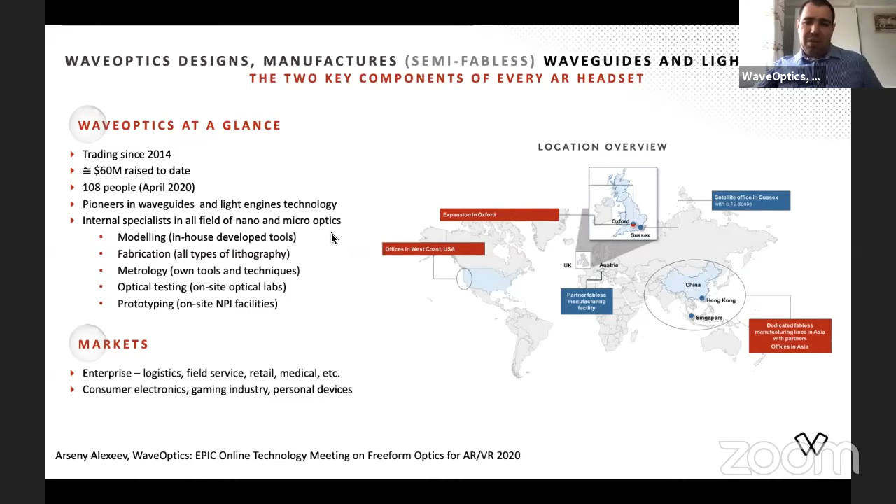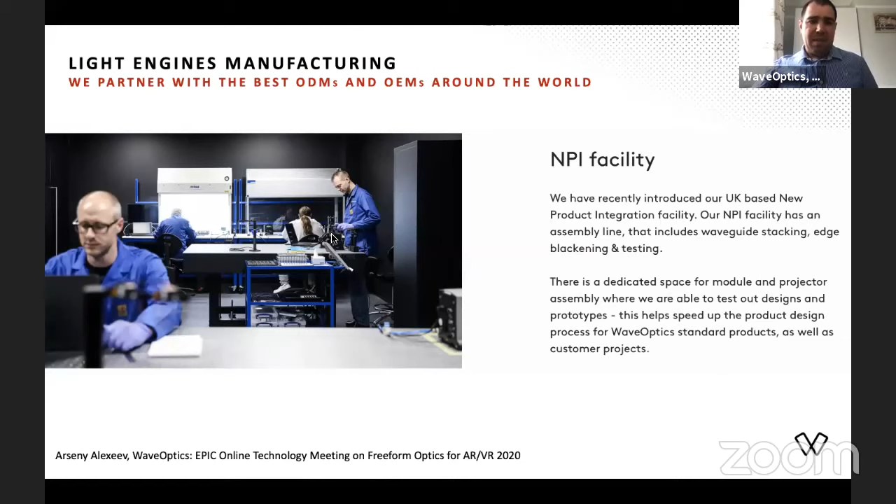Coming to the end of my presentation, just to answer two questions which Epic asked. This is what we can offer to our partners and customers. The first item is co-development. We do a lot of work together with our resin suppliers and glass suppliers in terms of bring-up of new processes. And the same applies to light engines. We do extensive R&D with our partners to develop new prototypes of light engines.

So the second item which we can offer is advanced metrology, and I think this is a topic which was covered in previous Epic meetings, because nanophotonics and micro-optics requires new solutions and different types of tools to control quality of the final parts. This can be very challenging because, as I mentioned, we work also with nanophotonic structures. Some of our structures are below 100 nanometers. And this is really challenging for any metrologist.

So you can see the list of the tools which we developed over the years. We do extensive characterization with SEM, AFM on the nanoscale of non-conducting samples with very high accuracy. We also have tools for chemical characterization. We do advanced ellipsometry, extracting refractive indexes at nanoscale. And also we have some advanced optical metrology allowing us to extract critical dimension in nanometer or even in picometer scale.

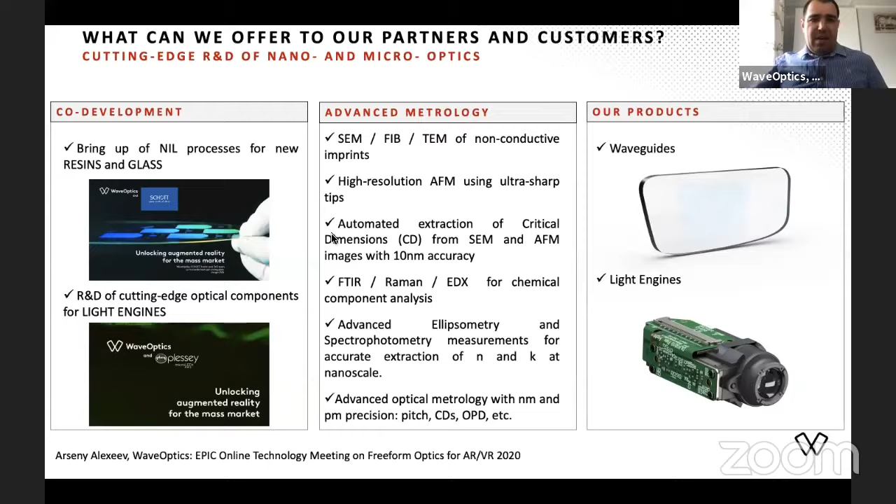And finally, in terms of light engines, of course, we're interested in advanced optics for them. As usual, smaller size, more lumens, less power consumption, and we're interested in different solutions. For instance, metamaterial-based lenses are one of our interests in this field. So with this, I come to the end of my presentation.

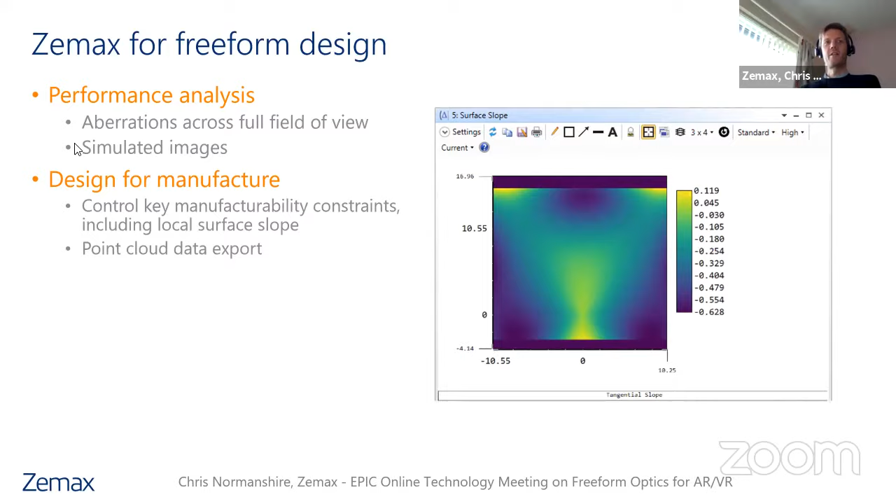So really, I'd like to end it there and just say, hopefully that's given you a different perspective on some things that are available. And hopefully we'll hear a bit more about what manufacturers can do with this data afterwards. But as I say, I'd love to hear where people are using freeform optics, or where they would like to if they had better design tools available.

Thank you so much. Design tools are absolutely very important for AR, VR. Maybe the answer to some of your questions we can get from Angela, who's going to give a talk right now from asphericon. I'll unmute you. How are you doing, Angela? I'm good. Can you see my screen? Yeah. Okay, perfect.

So I will talk a little bit about freeform from a manufacturing point of view. To give a broad overview, this is our slogan. I will come directly to freeform optical systems. We would like to make freeform a kind of standard in optics. If you want to realize that, we have to manufacture freeform optics as well as aspheres or known optical components. As you can see, freeforms sit in between in packaging, numerical aperture and field of view. The working range is extended, freeform surfaces allow you to break the symmetry, and high integration is possible.

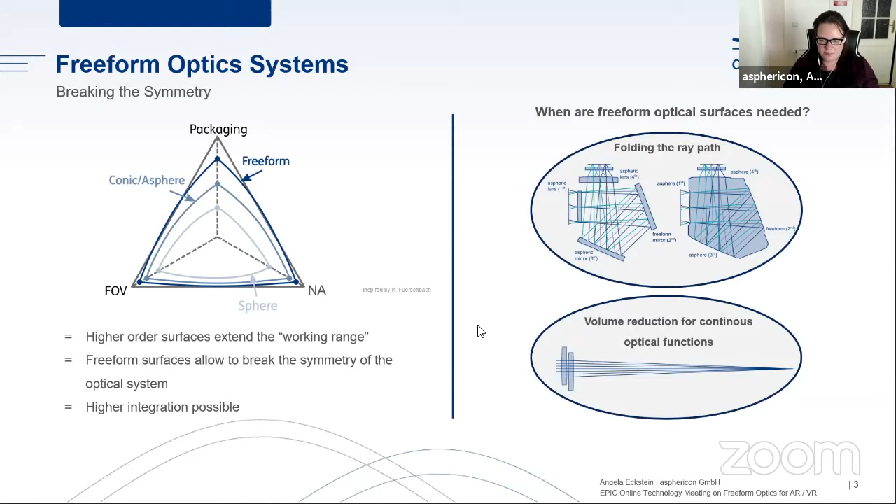So when is a freeform surface needed? When you need to fold the ray path in a very small volume, and this can be done with a monolith, for example here with three aspheric surfaces and one freeform, and when you need to reduce the volume for continuous optical functions. I got one slide too far.

So what is asphericon doing? We have a lot of different tools available to create such freeforms. We can do that in almost any material you can imagine, which means we have diamond turning machines and grinding and polishing. We also have a large metrology park to create designs, manufacture the optics, and measure the surface structure as well. But we not only rely on the design, we also need to introduce the form factors of the surface eventually.

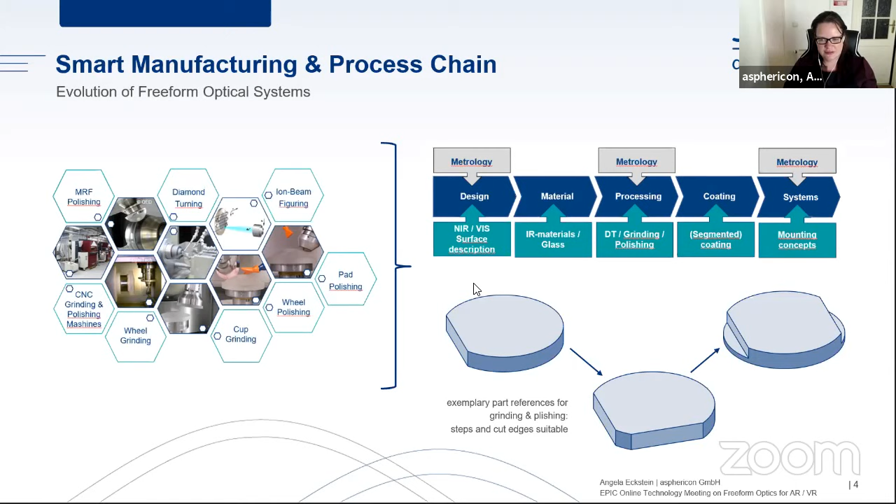Coming to an example, before we had a system that was very large, and this has to be folded into a smaller system made of germanium, and the volume reduction was 75% from the before system to the after system. And we also did a very good surface form deviation of only 1.7 fringes at the end.

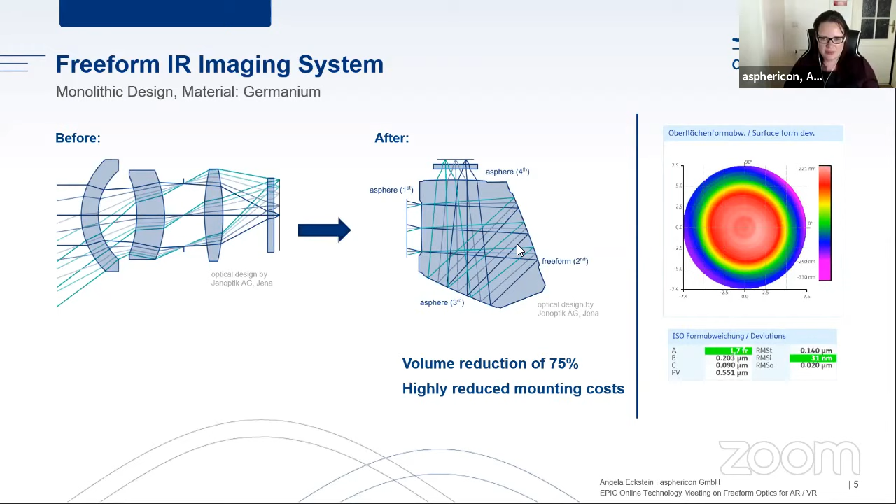And you also have with this monolithic system highly reduced mounting costs, because, as everybody who knows how to integrate optical components knows, it is very difficult. And having this as a monolith will reduce the mounting cost because the tolerancing is done within the manufacturing. My last point is higher order Alvarez systems.

So Alvarez lenses are two lenses that have a 3D or 2D optical surface that are shifted laterally against each other. So if you shift them in this direction, you have a focal point of 225 millimeters. And the good point here, you have a flexible focus shifter in a very short building length. And we also measured these items.

This is the RMS wavefront error of 55 millilambda, and also for the other option or setup system, we can see it depicted here. It's mounted. This system is already diffraction limited, so we have a very short building length for what you usually do with a telescope that is very long. We created a diffraction limited system without the long distance that a telescope usually has.

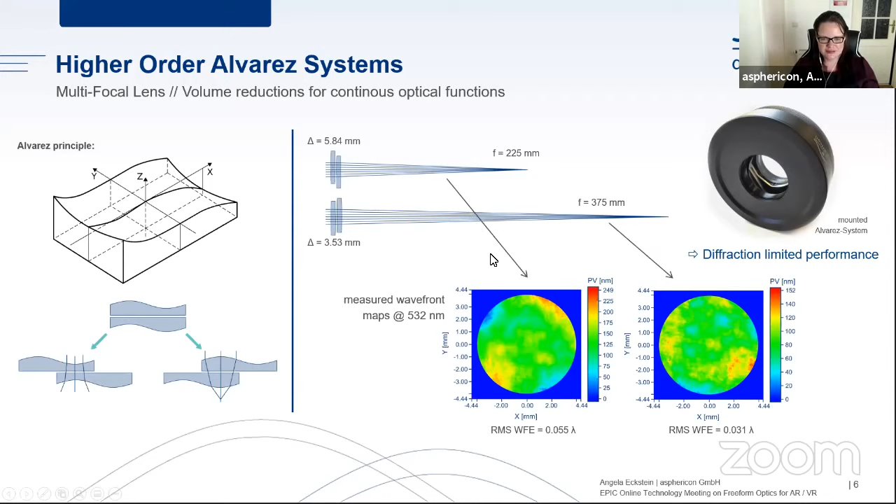All right, thanks. Thank you, and sorry for that. I couldn't find the button to unmute myself.

Great presentation from asphericon once again. The capital of optics in Europe is Jena. Later we go to the capital of optics in the US, which is Rochester. But before we go to that, there are a couple of issues I want to understand. We had the presentation from Chris. He's been working heavily on helping different optical designers in the field of freeform optics for some time. Chris, what are the main challenges, the main questions that you're getting from optical design companies?

What are the main challenges we're getting from optical design companies in this area? From companies, as I mentioned, it's been more the modeling of the diffractive waveguides. So surface relief gratings for the in and out couplers and pupil expansion systems, or volume holographic gratings. We've put a lot of work in recently to accurately model those, and things like diffraction efficiency, so we can model some of the more subtle effects that compromise the performance.

And this is where freeforms can potentially be a solution for this. Freeforms offer an opportunity to address these challenges. They offer unique advantages in optical designs. And this is something that Chris mentioned earlier, as well as others, is that freeforms offer the advantage because you no longer have to stay on axis. You have a lot more degrees of freedom in your design. You can look into miniaturization, again, off axis. You can get a lighter weight system to reduce that bulkiness, conformal shapes.

But a lot of these increased freeform complexities can lead to manufacturing complexities as well. And I have a couple examples over here on the right, just to show some of the unique designs and some of the trends that are happening with getting smaller and smaller.

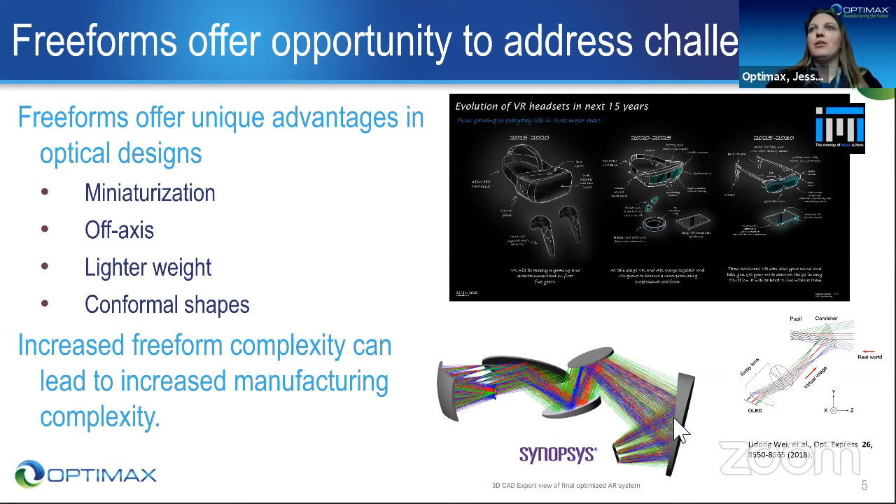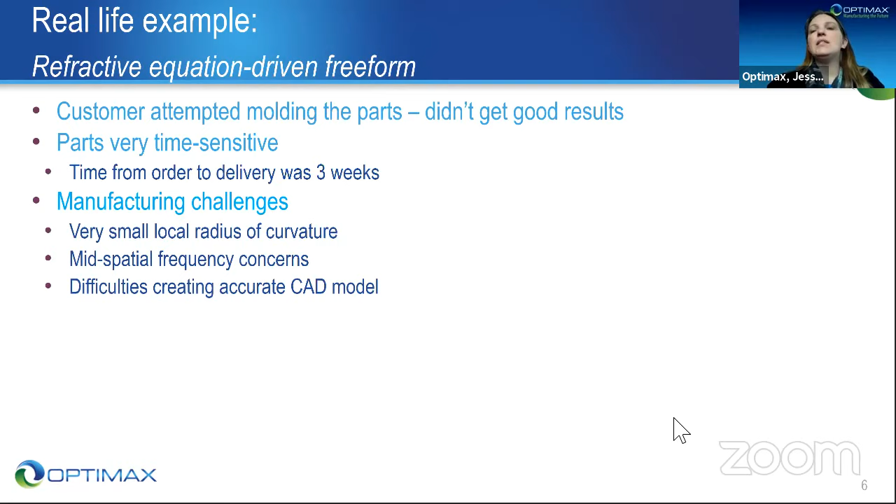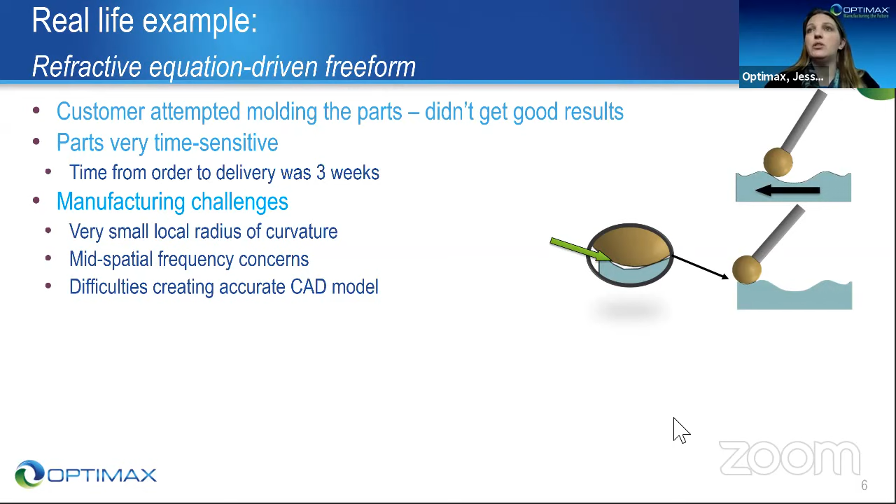So quick real life example, and then I'll conclude. A refractive equation-driven freeform. We had a customer come to us. They tried to mold these. It didn't work. They were very time sensitive. They needed these in 3 weeks. Manufacturing challenges, some people have mentioned this before, had very small local radius of curvature. Using traditional techniques, your tool has to be smaller than the features that you're looking to make. Mid-spatial frequency concerns, of course, we had difficulties creating the CAD model as well.

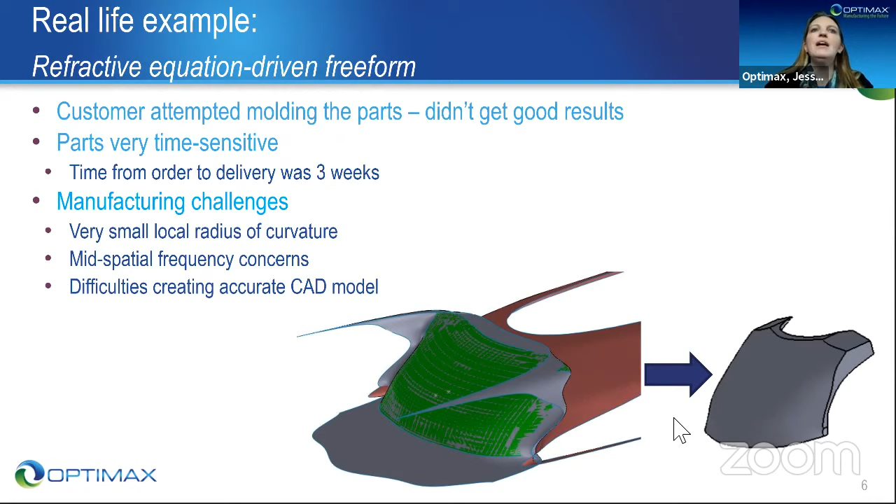However, we put a bunch of really great engineers on it. We developed a method to create this freeform CAD model. And within 3 weeks, our customer was delivered a beautiful freeform optic. So in conclusion, freeforms continue to be the future. We're trending towards higher precision and more extreme surfaces. They're being used to reduce system size, off-axis design, and conformal windows and beam correction.

One thing I did not mention, and happy to talk about it later, is finding ways to reduce total error. Not only is wavefront error important, but positional error is important as well. And experience leads to breakthroughs. I firmly believe that collaborations are driving more extreme surfaces, and Optimax is very interested in partnering with additional universities, research institutes, and many people from industries such as yourselves. As an industry, we continue our journey to higher precision freeforms.

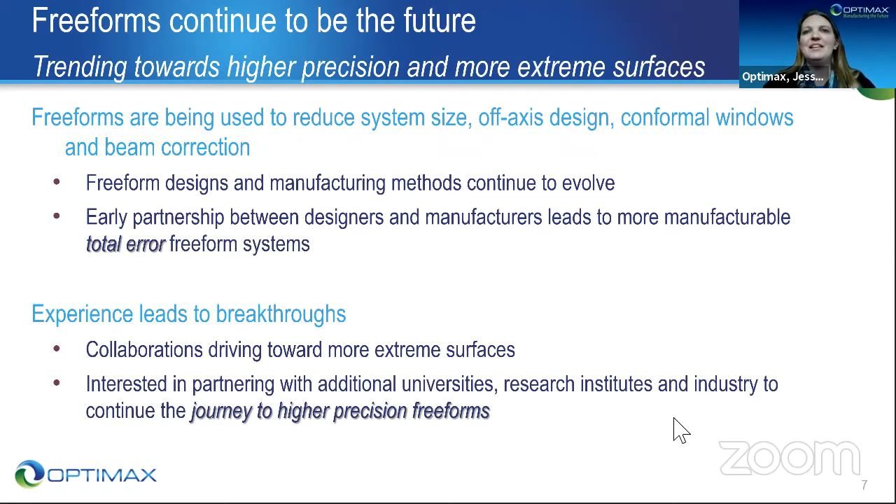Thank you very much. Thank you so much, Jessica, for your talk. It's very nice that you're open for collaborations. That's what we're looking for. I would like to first ask the audience, if you have any question, please raise your hand or just raise it electronically.

Yeah, please, WaveOptics. Yeah, just a quick question. You mentioned some thin film deposition. Would it be possible to get a range of materials which you can deposit, and whether you offer it as a service? Yes, we offer it as a service. And so we have many different coating chambers. I mentioned many different deposition techniques. We do a variety of different materials. I think maybe offline we can talk about your specific needs. But obviously glass, crystals, polycrystalline ceramics, all of those things as well. Sounds good. Thank you. Mark, you wanted to say something?

Yes, to Jessica. Certainly, I think your company is a fine company. I didn't want to imply that, but why do you think your firm has a reputation of kind of violating the traditional definition of freeform? So I didn't quite catch the very last part, but I do know that. So one of the things that we've mentioned about freeforms: if our customers want to define an off-axis asphere as a freeform, we're not going to stop them. How we define freeforms is how we manufacture them. If we can't use symmetry in the manufacturing process, to us, it's a freeform.

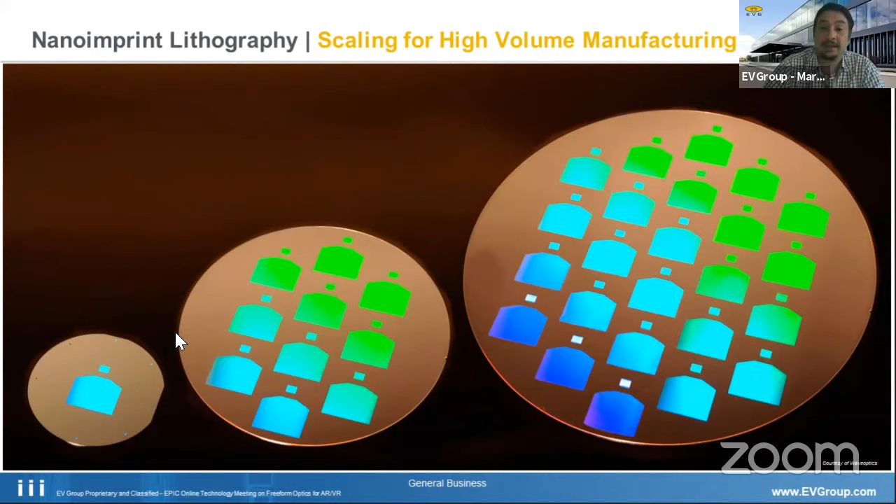And basically what we can do here is go through this whole process, starting off with such a single die. This time, of course, we don't show details of the design of the structures. That's proprietary to WaveOptics, but we have a very nice reference design. And here you can see it also starts off with a single die, which you make by E-beam lithography and etch into the wafer. And then we go for the step and repeat imprinting.

So we do the nano imprinting one by one, taking one die, doing exposure, separating and making the next one until a 200 millimeter or even a 300 millimeter master is filled. That's the so-called step and repeat master. And from this one, because it's still a very precious thing and you want to use it for a long time, we then make so-called working stamps, which are actually used for the imprint.

And from every working stamp, we can also make many imprints. And so you can scale from one die to really high volume for WaveOptics, for the production of such waveguides.

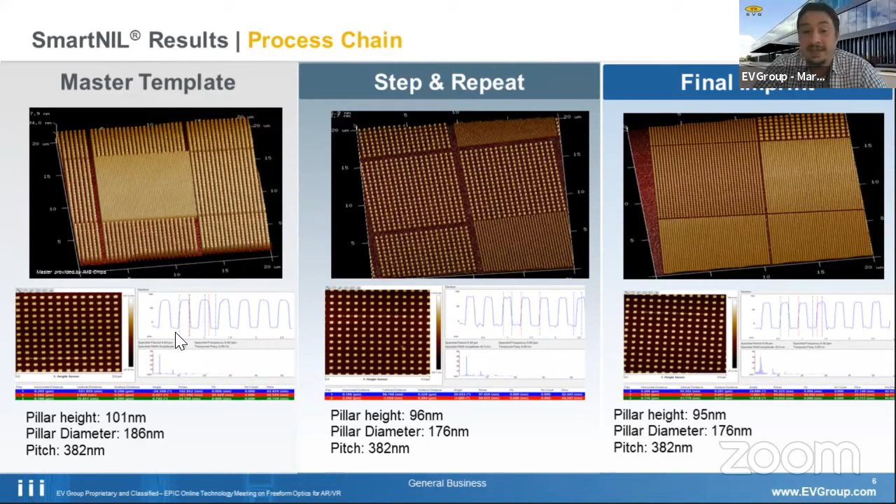This is a common thing that's well known for any molding process. Thermal molding processes also need to live with some deviation from the master. However, it's stable and can be biased, and that's the nice thing. And of course, there is literature on what structures can be used for waveguides and augmented reality, and basically we have reference structures for all.

So for example, NIL Technology, Jose knows them also very well, provided us even these very fancy looking slanted structures. But from binary, blazed, slanted, or whatever structures, we can do anything that's required here and replicate in a single shot, very efficiently in functional materials. And if you have a master, we can go for the step and repeat imprinting and directly to high volume manufacturing with our systems. We have this all in place here at headquarters so we can give it a run for the development.

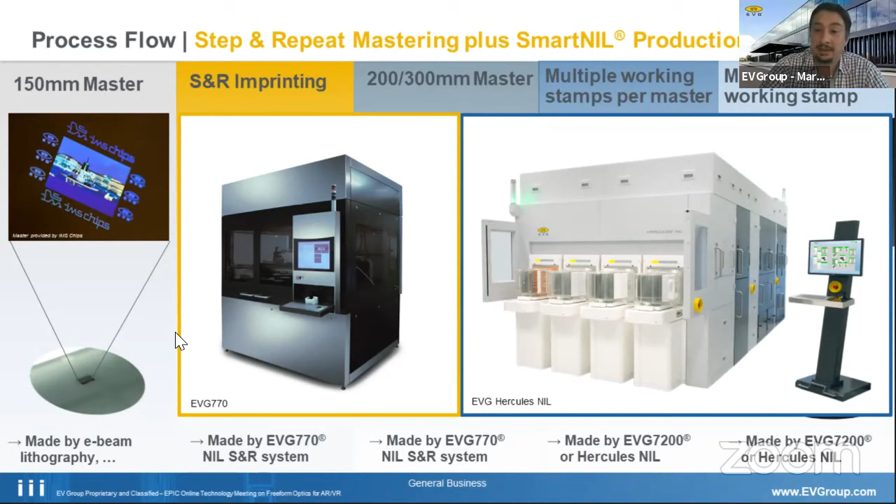And actually, it was quite a journey to get there. EVG, as I said, has its 40 years anniversary. Two or three years ago, actually, we had a 20 years anniversary of nano imprinting. So we had started at university, but around 2013 it really picked up that people wanted to see it in production. And of course, augmented reality was a big topic and driver here. And as you can see, this sped up the development quite a lot.

And when you look at the timelines Yole is predicting, we would be happy to see this really happen, but maybe that's not only on us, but we are definitely convinced that guys like WaveOptics will make this happen. And we are looking forward to it. Personally, I'm really looking forward to getting this on the market.

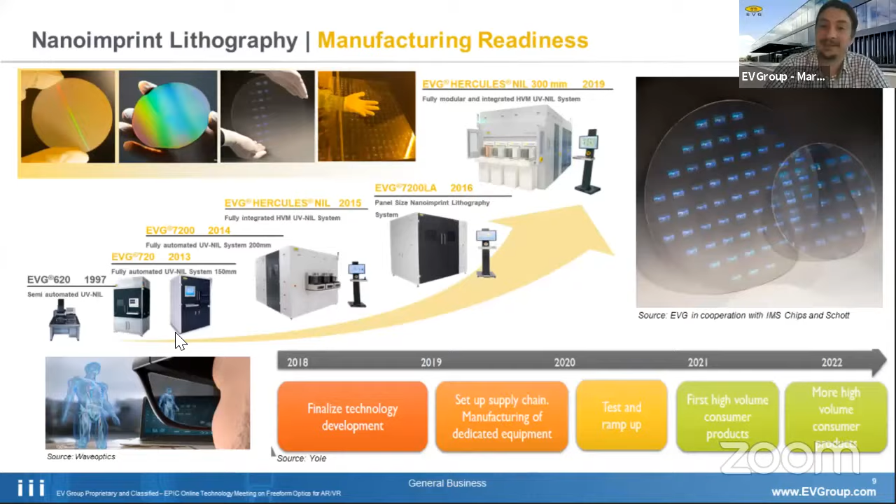How can you engage with us? What can we do for you? Basically, we have a smart way to collaborate for success, which we call the NIL Photonics Competence Center. You can establish the manufacturing process here. You have a close collaboration between process and equipment needs. And you can bridge the gap between R&D and volume manufacturing.

So any idea you have in the lab that you want to get into the fab soon, for a short time to market, let us know. And very important, I want to mention here, don't limit us too much to nano imprinting. Augmented reality doesn't only need the waveguides, though of course they are a very important part.

However, there are many sensors, maybe 3D sensing or other sensors required for these devices with very small form factors. So we are very active in wafer level optics. We have our own development line and pilot line here, and we have a track record for high volume manufacturing worldwide.

We can do advanced resist processing. We can do heterogeneous integration, so combining different form factors, combining different materials. And last but not least, there are also new ideas to apply, for example, for micro LED displays, the same methods as for CMOS image sensors: go for 3D stacking and hybrid bonding.

So yeah, what can you do for us? Very simple. For those who already work with us, let's make it happen. I want to buy your devices soon. For those not yet working with us, let us know what you want to get out of the lab into the fab very fast. Is it the new sensor? Is it the new display or whatever? Please engage with us. We would be happy to discuss and maybe even develop new equipment based on this.

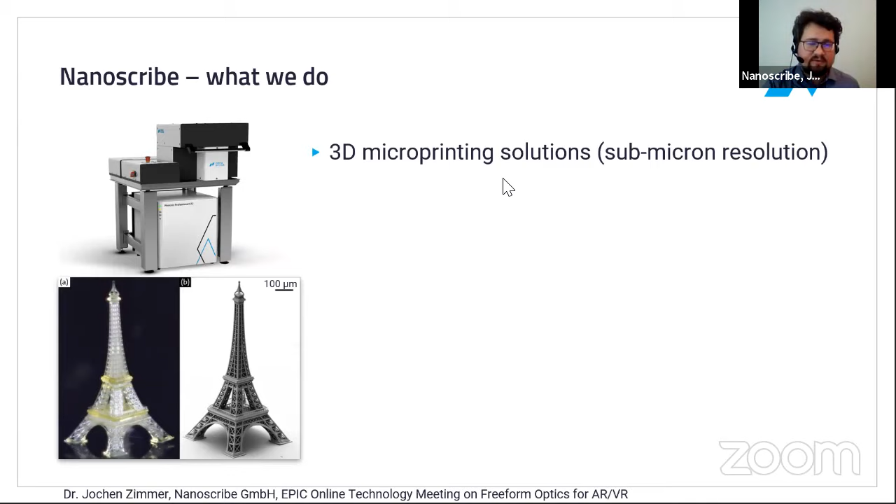So what does Nanoscribe do? We are a solutions provider for 3D microprinting solutions that are centered around 3D microprinters, such as the one you can see here in the left-hand picture. These machines allow you to create a 3D freeform structure. Many applications, especially in the beginning, didn't have anything to do with optics. So any shape you like with resolutions down to the submicron. Like I mentioned in one of the questions, 160 nanometer feature size can be created. This example, of course, is just to show off. Eiffel Towers are a common way to show off in the 3D printing community. Of course, we want to go to real life examples in a moment.

This kind of 3D freeform creation is made possible by the magic of two-photon polymerization. I have no time to go into that. If anybody is interested in the details and isn't aware of the capabilities of two-photon polymerization, just contact me afterwards, please, and I can explain it to you in more detail.

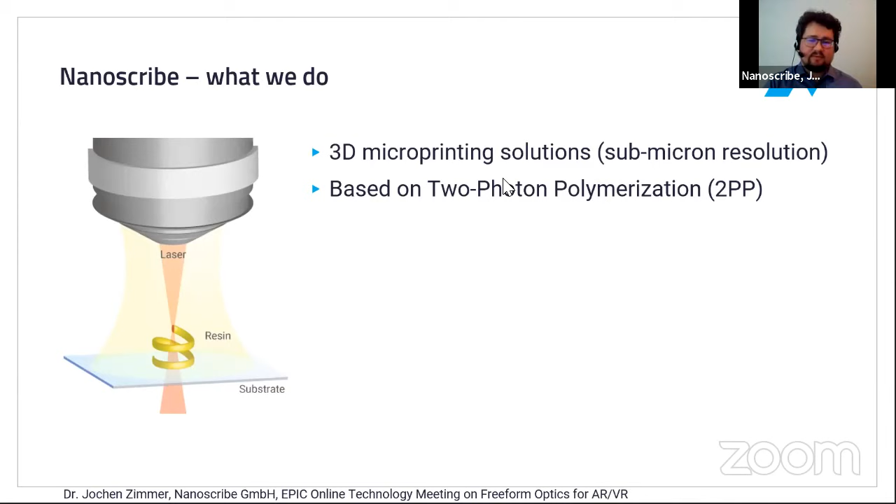Suffice it to say, we have a polymer-based process. We have a liquid polymer resin that we cross-link in a 3D shape by moving around a laser focal point in 3D, and thus we can create high-resolution 3D polymer forms. We are the market leader with this, and we have way over 2,000 users already.

Many of the systems are used by academics. They're all very happy to be mentioned as references. You can see a small selection from our references here. We have industrial customers as well, but as you can imagine, some of them do not like to be mentioned in this context. Two that do like to be mentioned are MoveOn and YNG Optics from Singapore and Korea, respectively.

And the reason they like to be mentioned is that they are service providers, and they're happy for people to talk about their capabilities. What they are doing with the technology is prototyping and mastering of micro optics. Their customers like to have micro lens arrays or other micro optical structures, and they very much appreciate the fact that you can prototype very quickly with transparent materials with our technology, test and iterate within a day if necessary. So many iterative cycles are possible within a short period of time.

And then afterwards, the same technology can be used for creating masters, which our customers then turn into nickel shims, for example. For replication, of course, nanoimprint lithography is possible too. From these masters, you create the tools for mass production. I mentioned the example of micro lens arrays. Other examples include diffractive optical elements and any kind of angled surfaces. We've seen previously mentioned blazed gratings or similar kinds of gratings.

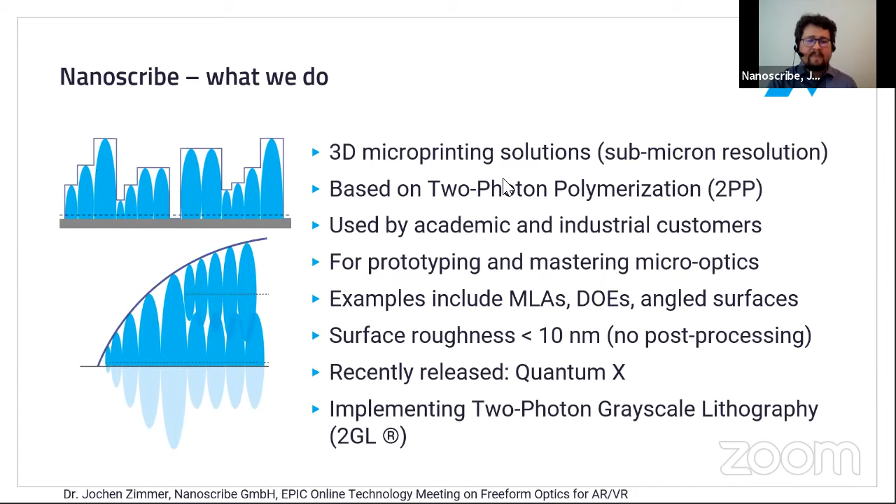You change the size of the pattern, the height of the pattern that you expose, by varying the laser power. In this case, you change the size of the liquid that you cross-link and turn into a solid. And with this, we have the possibility to create very complex shapes very quickly. So what do we offer? Well, we offer this machine and the solution surrounding it, incorporating the two-photon grayscale.

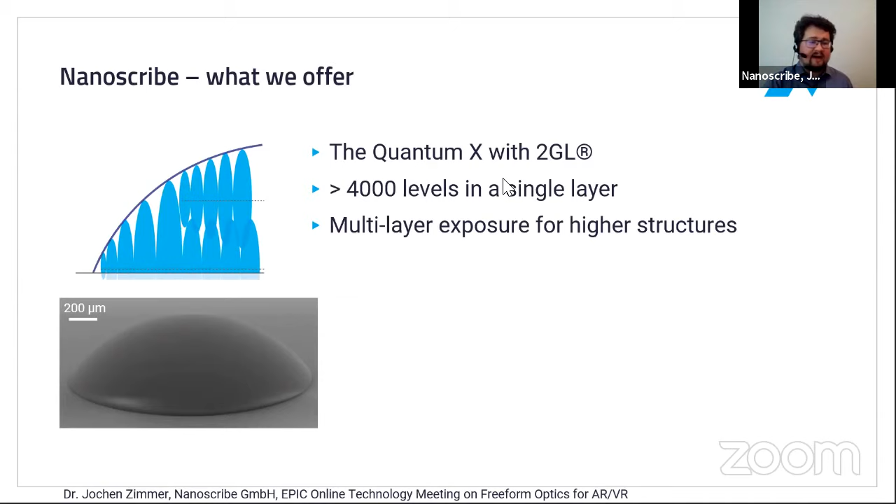It allows you, for example, to create 4,000 levels in a single scanning layer of diffractive optical elements or other patterns, so also tilted patterns, tilted DOEs or blazed gratings, things like that for coupling out light are possible. You can also create smooth surfaces with a small number of layers by multi-layer grayscale exposure, which can create several hundred micron high micro and mesoscale lenses.

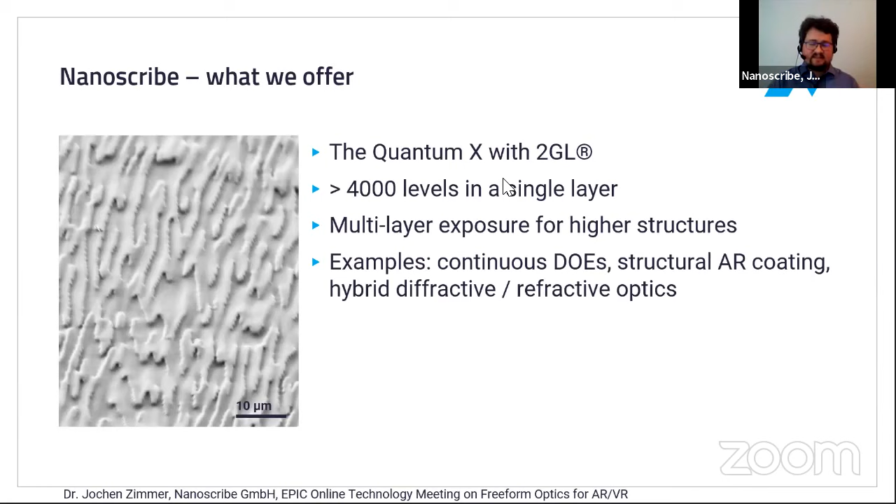Other examples include continuous diffractive optical elements, so 256 levels or even over 4,000 levels for a DOE are possible. And you can also combine this with making other freeform optics, for example, a structural anti-reflective coating by including some kind of moth eye structure. And you can have basically any hybrid diffractive-refractive combination. You can feed it directly into the machine and print this ultimate freeform surface.

You can very quickly create prototypes and test them, measure them and iterate them. If you want to go to larger areas: we come from microfabrication, so for us, a centimeter is already quite large. If you want to create, for example, a 2x2 centimeter DOE with this process, you can print it within 1 week right now, and we're still looking for further optimization, of course. A higher freeform structure, for example, 100 micron total height difference on the wafer, 1.2 by 1.2 centimeters, would also take a week.

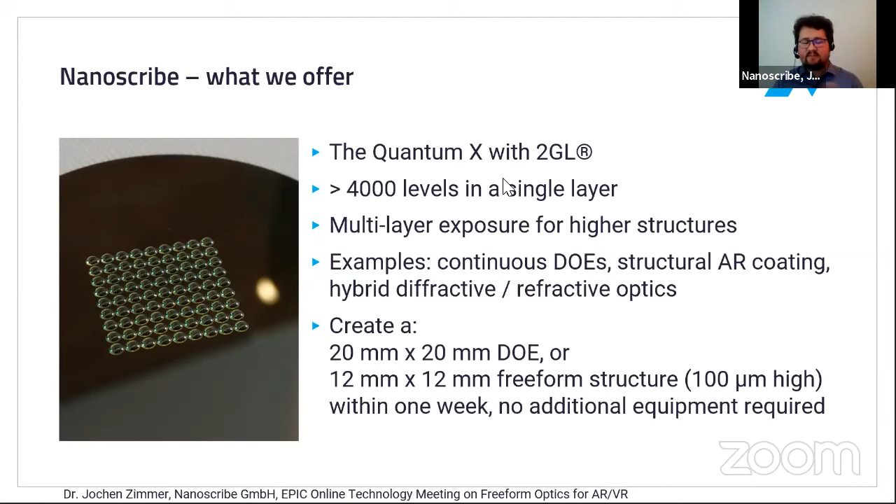Higher aspect ratios are possible. They just might take a little bit longer. What are we looking for? Well, basically, we're looking for early adopters of this technology. We have already sold systems to academia and to industry.

And if you are interested in discussing this technology with us, if you have, for example, and this would be something that I really would be looking forward to hearing from you, if there's geometries that so far you have gotten the feedback, okay, well, this is just too challenging to manufacture for us, then we would be very interested to take a look at it. Maybe with 2GL, this is now within the range of possibilities. And then we offer feasibility studies to test it out together with you.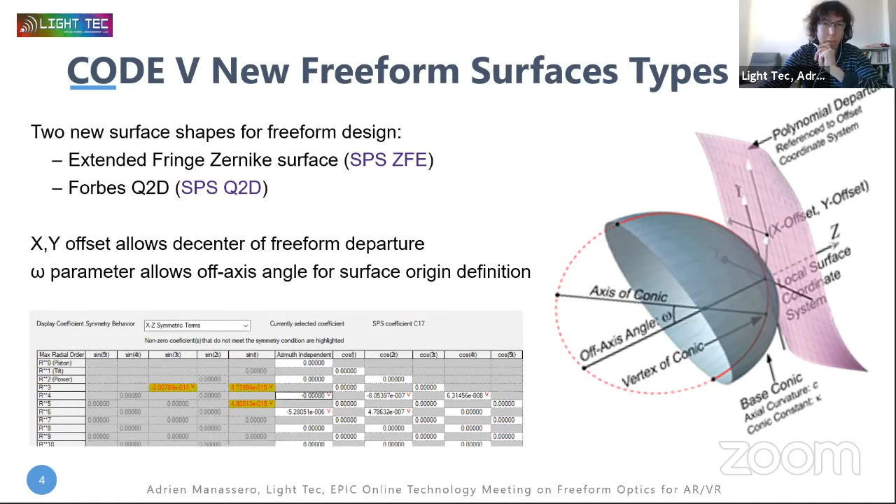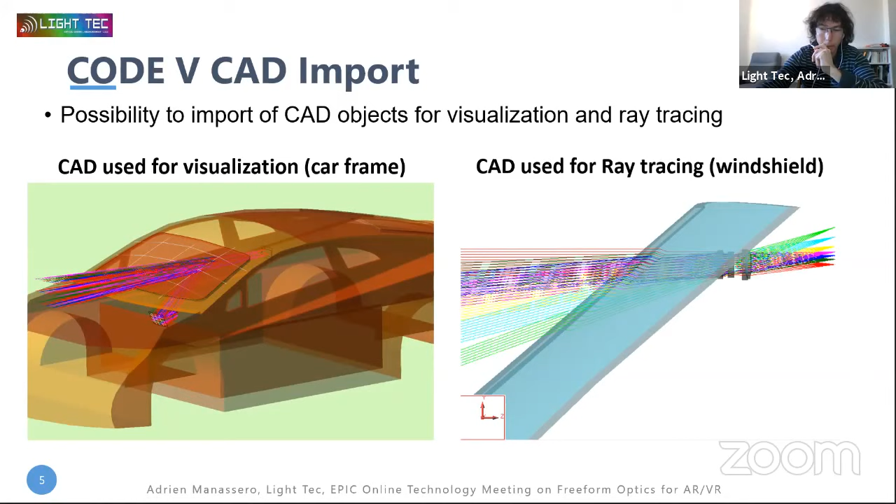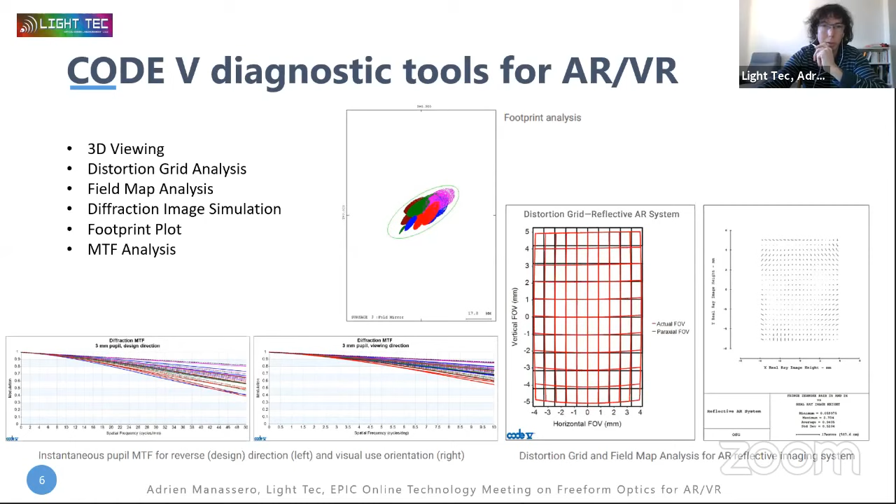But now that we have a proper system, we want to simulate what the user is going to see. For that, we use LightTools. LightTools is a simulation, design, and analysis software. It also has its optimization module and a photorealistic rendering module. It is used in a lot of applications because we can find ghost images. We can also see stray light from the environment. It's possible to set different sun positions, and there is a visual rendering.

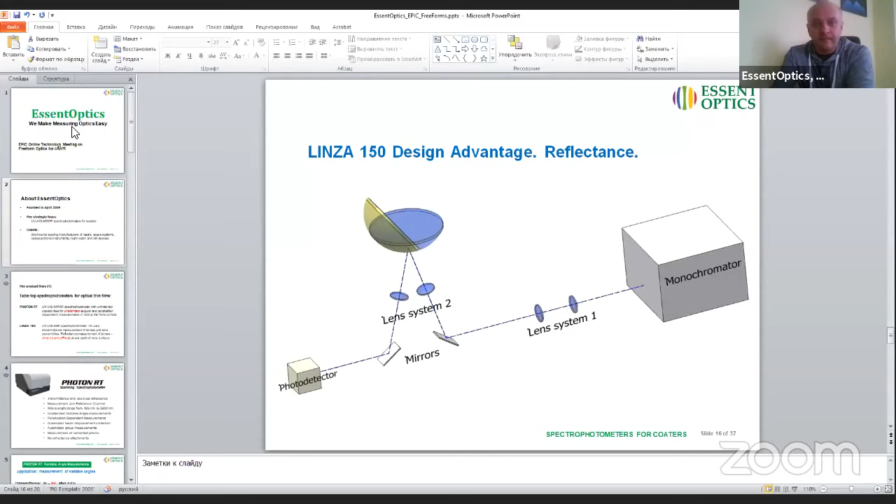Let me very briefly show you what we can do and what we do here for optics. Okay. Do you see the slides, right? Yes, we do. 37 of them. No, that's not the full number. Okay,

we are from the metrology side, so we are measuring optics, and we produce spectrophotometers for coaters, for those companies who are using optics in their devices and need to measure their optics before using them in the final photonics instruments. Basically, we have two main product lines which fit into this application. The Photon RT line is a spectrophotometer for unattended angular and polarization dependent measurements of optical thin films on flats. And then we have the LINZA 150 system, which is designed for on-axis and off-axis measurements of reflection and transmission on lenses.

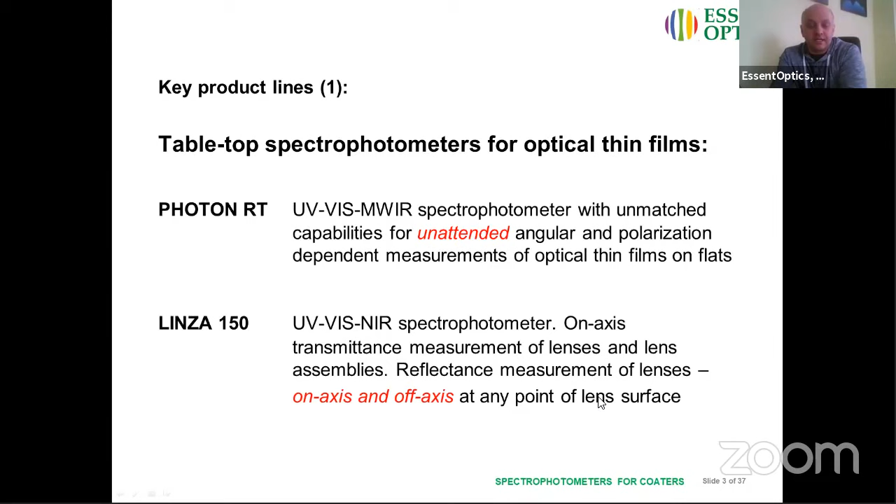A couple of key points regarding this instrument, which is used for flats, is that we can match the needs of customers from 185 nanometers in the UV range up to 5.2 microns in infrared in a single system. And in the same system, we can do unattended variable angle measurements, polarization dependent measurements, automated beam displacement correction, group measurements, cemented prisms of different shapes, and we basically don't need any reflectance attachments for this.

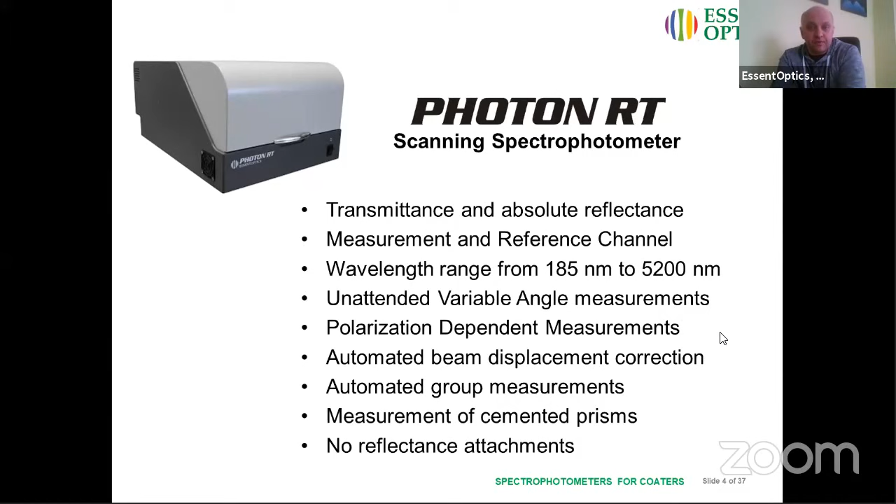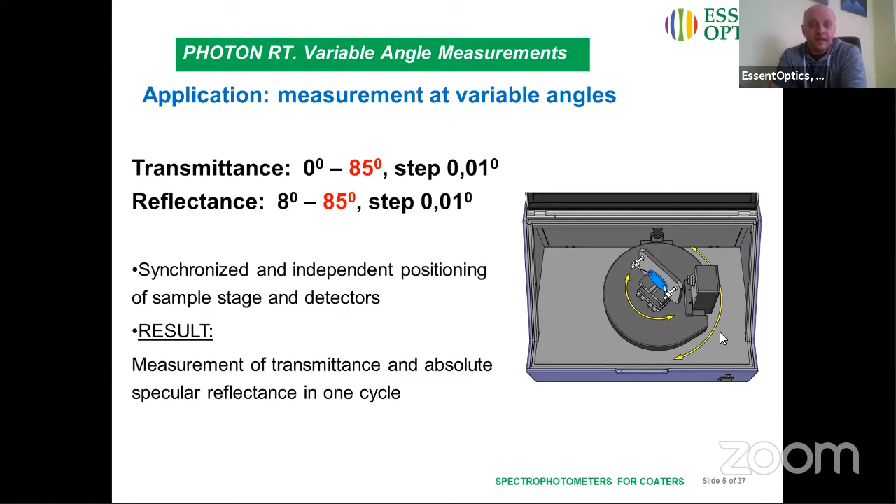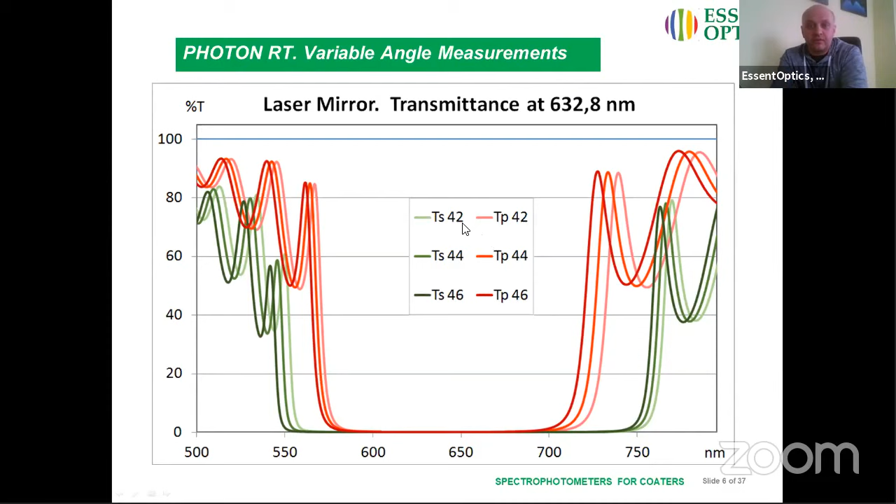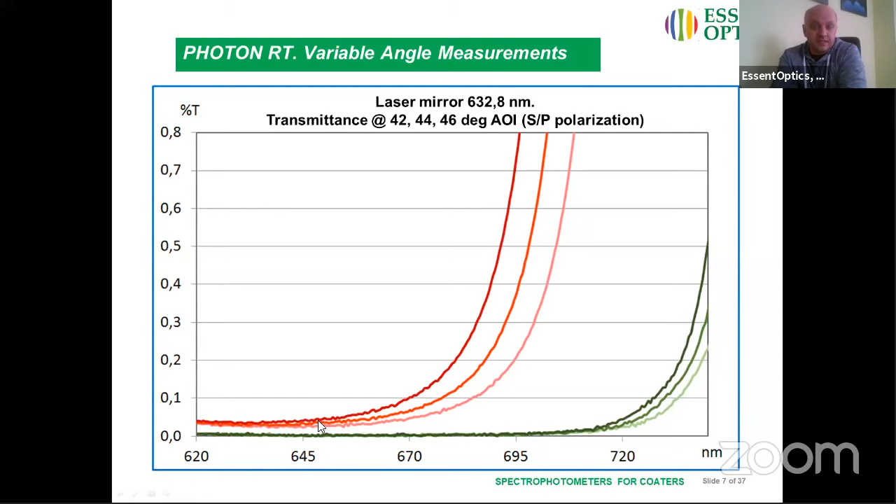Currently, our latest capabilities cover the range of angles of incidence from 0 to 85 degrees without any attachments. You can see an example of a laser mirror, and the customer asked us to measure this mirror from 42 to 46 degrees for transmission. And these are the actual values we were able to measure, and the actual noise in the system we were able to get during these measurements.

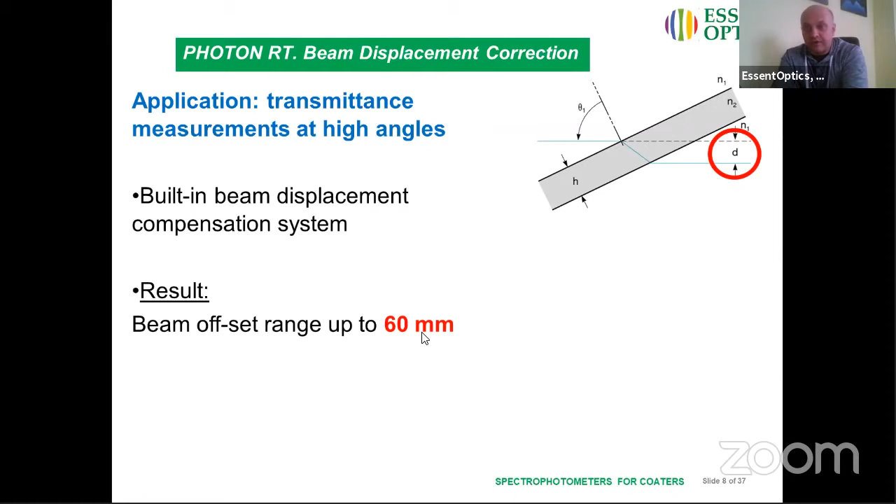A typical application for flats is when you measure different angles of incidence, so you have a beam displacement, and we can cope with this, and our system can automatically control this displacement up to 60 millimeters, both positive and negative, which is a very unique feature not found in any other system on the market. Like this.

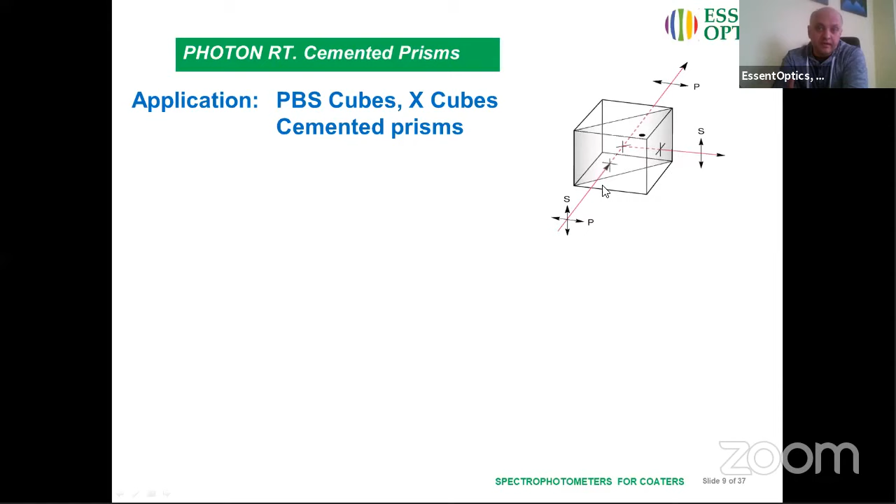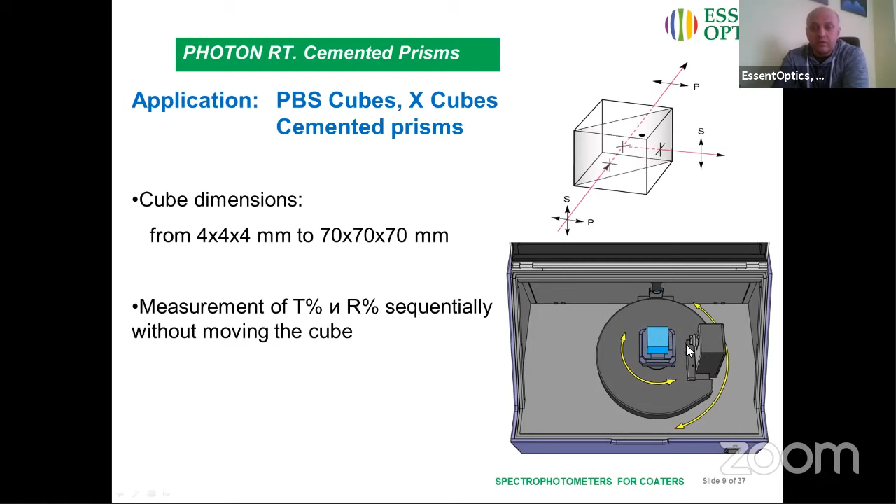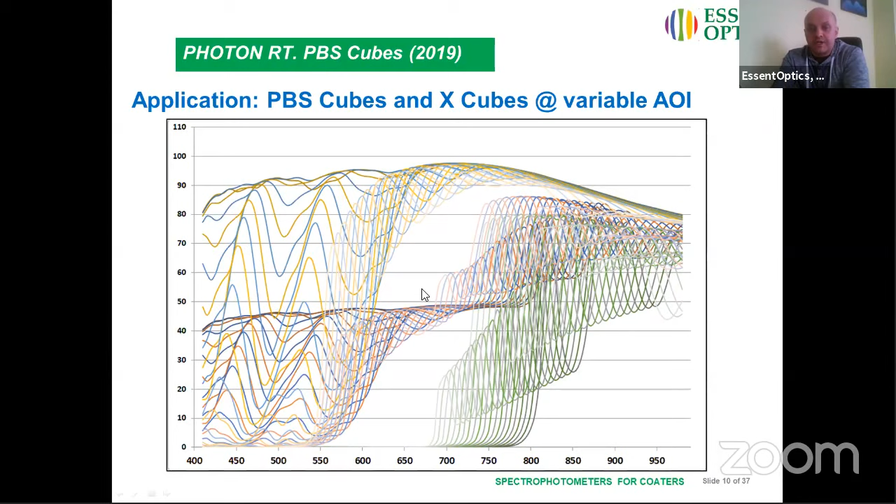So the cubes are a clear example. We can go from 4 millimeter cubes up to 70 millimeter cubes in the same system, and can measure them clockwise and counterclockwise. But what's more important, and this is a particular application for AR devices, one of our customers asked us to measure these cubes at variable angles of incidence, as he's producing goggles for AR applications. So that cube in those goggles was specifically measured at different angles of incidence, which we were able to do pretty well.

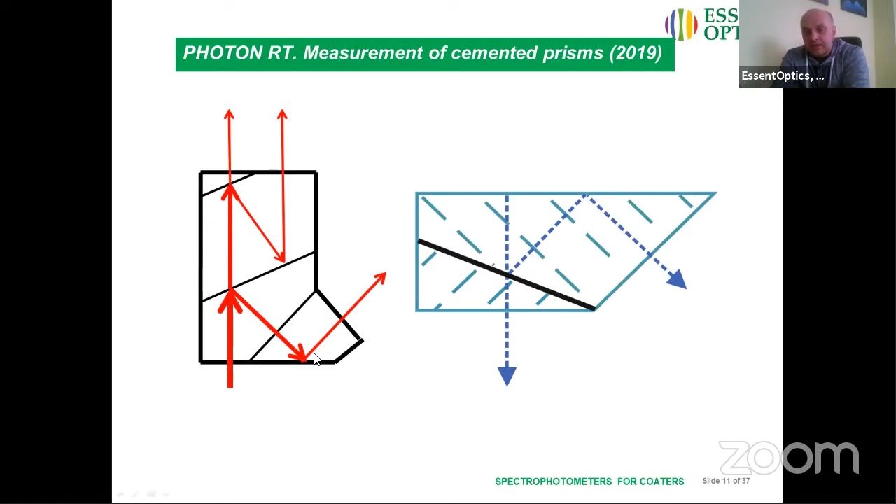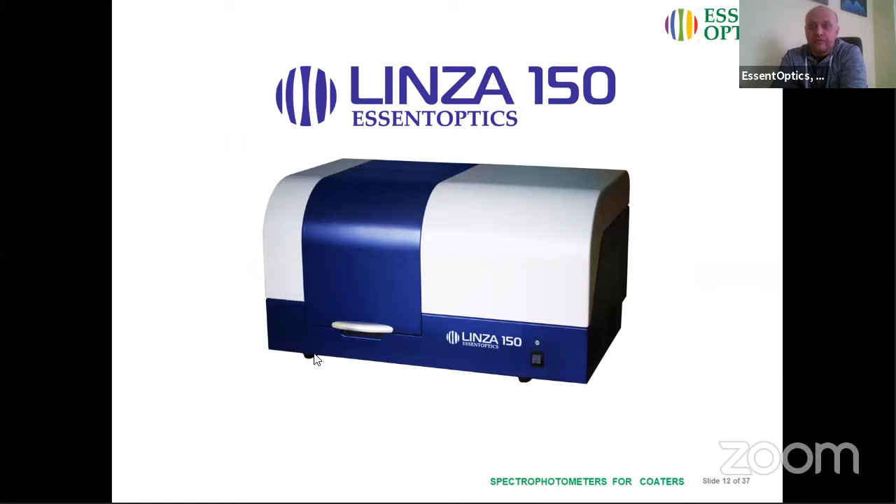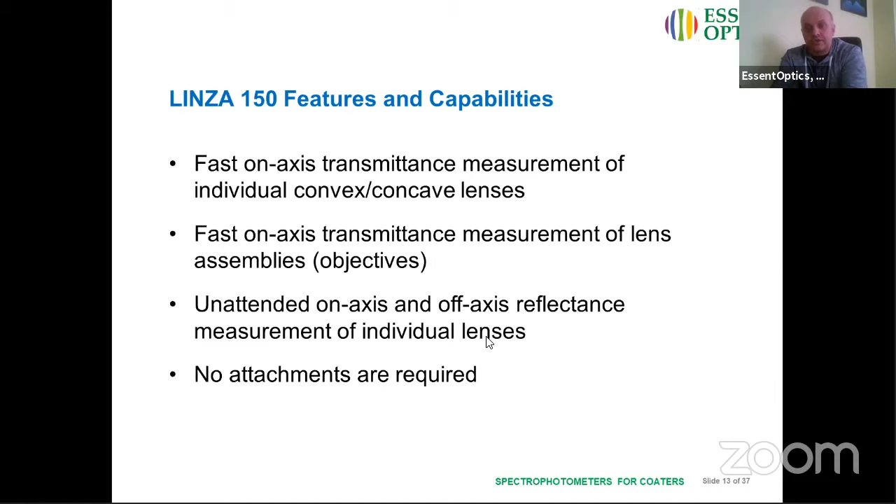And this is an example of complex cemented prisms which have one beam coming in and different beams coming out at different positions and different displacements, which is also a very challenging feature, and we can do this as well very well. Another application which might be helpful for most companies involved in AR and VR is measurement of lenses, different types of lenses. We can measure reflection unattended on axis and off axis, meaning that we can basically measure the reflection from any point on the lens surface, fully automatic.

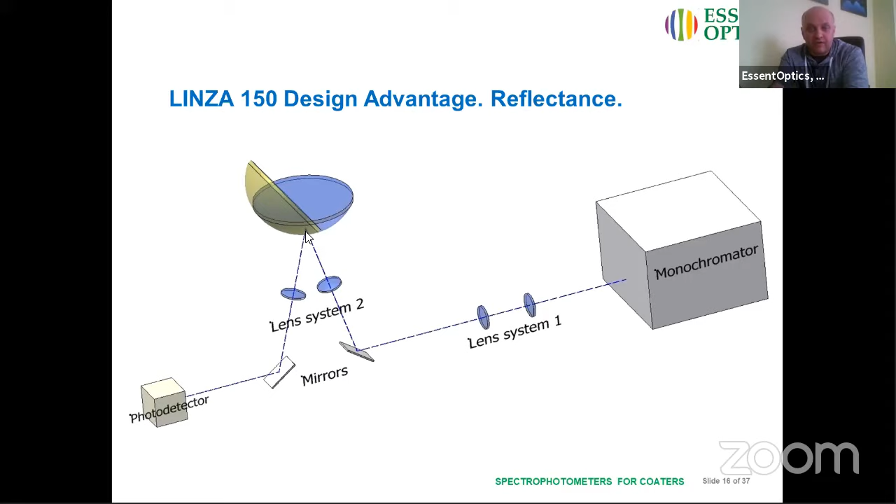I will skip a couple of pages and go to this picture because this was mentioned by colleagues from Balzers. The question was how to coat different shapes of lenses, but another stage is how to measure different shapes of lenses. So in our system, we can actually move the lens with a three-axis movement system and position the lens exactly against the focusing beam in any position and measure this area of the lens very, very accurately.

This is an example of an off-axis parabolic lens used for specific vision systems. And we were able to measure both these sides internally and these sides externally for uniformity.

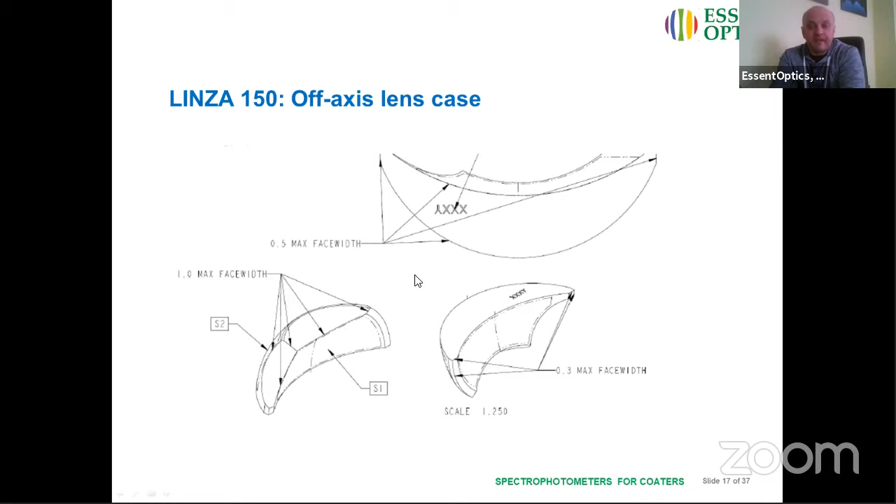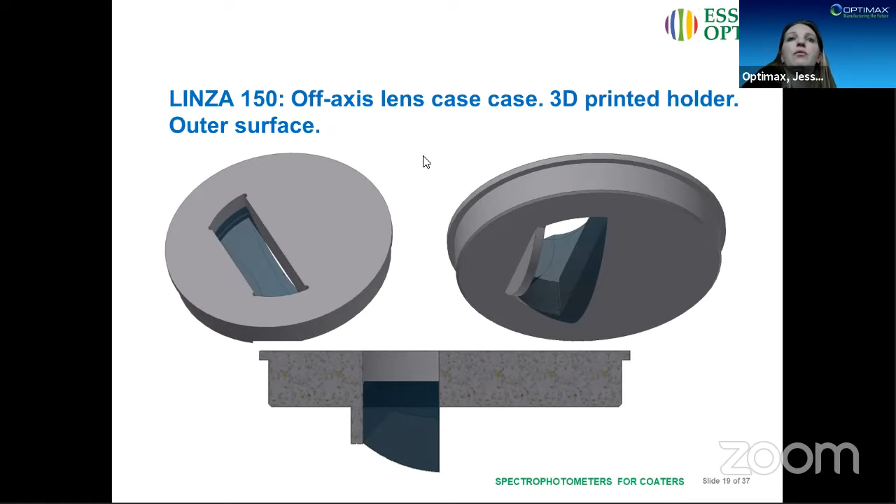Jessica, we've been talking quite a lot in the previous meetings about the metrology problems that we have with freeform optics. What do you think of this? Are we on the right path? Is that something that we can use? Can we work on this? Well, this is a slightly different topic than some of the other ones, but this is looking at a spectrophotometer for looking at a freeform surface, which is definitely of interest, and I think that goes into actually a comment from earlier today.

Sorry, everyone's faces keep moving.

John mentioned earlier about looking at coatings on freeform optics, and looking at basically coating uniformity, and so something like this is definitely very helpful for that. Yeah, and in addition, Jose, you're right. Metrology for freeform surfaces continues to be, in my opinion, a gating item. And I mentioned briefly earlier something about total error, combining both wavefront error and positioning error as well. And so it all plays in, and as a group, all of us are learning a lot more about how to make these a lot better moving forward.